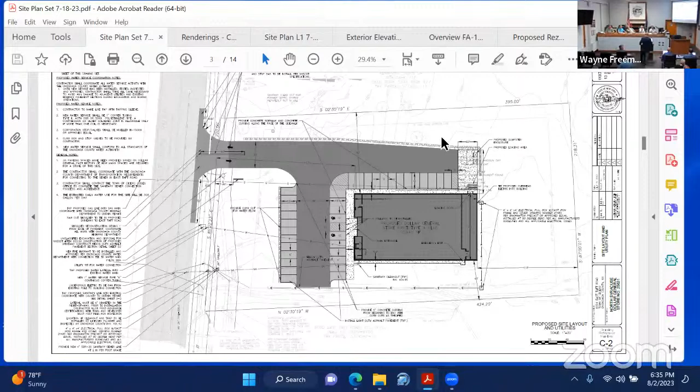Yeah, so this is the simulation I was talking about. Each one of those lines represents a wheel of the vehicle and its turning movement. They use a 53-foot trailer, I think it's a WB-67, which is the largest vehicle you're going to see on site, and typically one of the largest vehicles you see on the highway, unless it's a tandem or something else. But that is their typical Dollar General delivery vehicle.

There'll be other box trucks and smaller vehicles delivering soda, chips, and some of the regular groceries they get in there. So we show all those movements on site, and the county will look at this as well, because they don't want any trucks backing up on our county road.

They've been working with us, and there are different phases of approval for their permits. So we're well on our way, and we've been approved with what we have right now. I think the final approval for the county is when we get a contractor on board, for the contractor's information to be submitted, insurance and all that sort of thing. But that's separate from here, obviously contingent upon your approval and the county being fine with our entrance.

The other items I want to talk about are utilities. All utilities are ready and available. That's why this is a prime site for Dollar General - water, sewer, electricity, all of it coming into the site underground. We're going to bring our electricity underground to the south part of the site along the property line, and then up to a pole that goes into the building, so it's out of public sight.

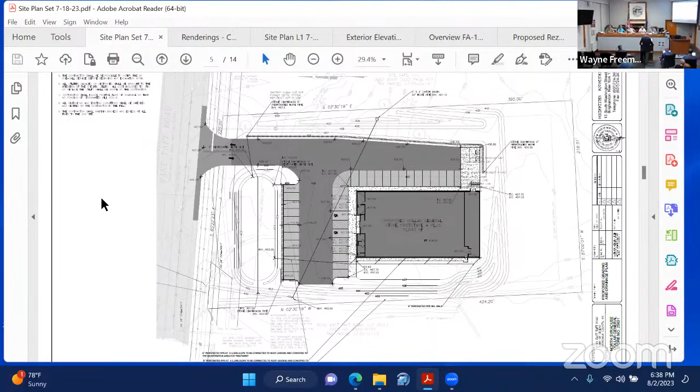And moving ahead, there's a little cleaned up version of our site. This is our soil and erosion controls for the site. You see those large lines up in the swale up top. Those are check dams, basically to slow the stormwater and let some of the sediment fall out before it's collected and

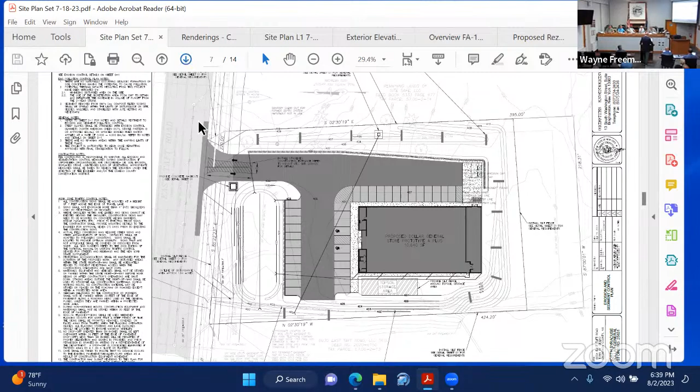introduced back into the existing storm drainage paths. This version here shows the different media that goes into some of the site, stormwater included. That little track we talked about shows the different soils within that treatment chamber. I call it a pond, but it's meant to be dry most of the time. It infiltrates, collects through an under drain, and exits the site.

So this is attempting to show some of the different greenery and landscape that occurs. Since we last met, we had a request to have more regional plantings, not something that thrives in Texas or Florida, something that we're used to seeing here. So the typical plantings you see here, as listed, are native species to the area. If not native, they're ones that actually grow here and are typical.

The sheet you just backed over, the previous sheet, shows a lot of hatching, and that basically shows lawn and rehabilitation. So if you wanted to back up one.

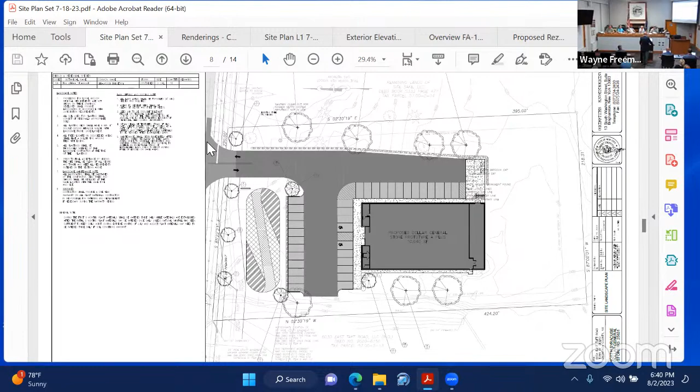Yeah, so this just shows where we're planting lawn, where we have certain soils for stormwater infiltration, and the various surfaces. The darker parking lot surface is heavy duty paving, probably thicker in pavement thickness than any road in the county. It's a pretty beefy section. Where the parking is, it's a little thinner because there's not as much movement as well as large heavy loads. That's the difference in the parking surfaces.

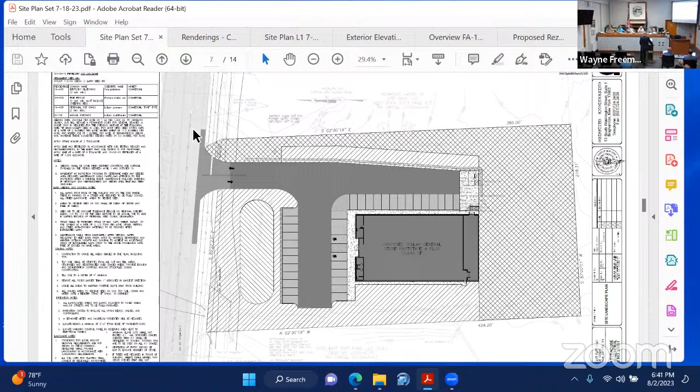And they're all in the back of the plan set where it shows you the details for the various types of pavements and details. If you wouldn't mind jumping ahead.

One more, and these are our stormwater, typical stormwater controls. Those are DEC details that just popped up. Let's see, can you go back one more, back one more. And we're almost there, one more. Yeah, so these are our typical stormwater erosion control details.

They are part of our SWPPP, or stormwater pollution prevention plan. They will be approved by DEC. They're DEC's typical details, as you can see. We're not doing anything out of the ordinary. They're all passive stormwater devices, nothing that's going to have any special equipment needed to maintain or anything like that. So we can advance to the next slide.

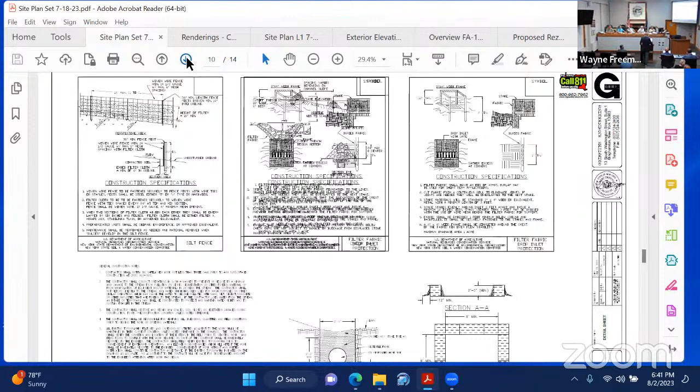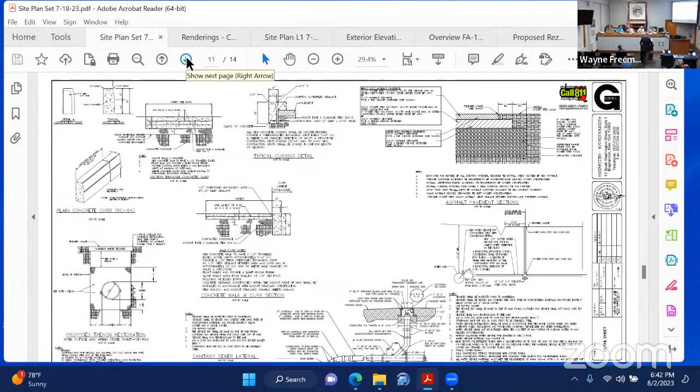Again, they're not really planning items, but they're important that you guys take a peek at them. Of course, our signage, we expect to meet the signage requirements through the Dollar General branding. There's a display of some of our accessible parking signs. And obviously, when you have an access aisle, you have a no parking sign as well, and this just shows the installation of those.

And the signs right in front of the building are installed in concrete bollards with a decorative cover, so no one can breach that flush surface, where we don't have the curb, where we have it flush.

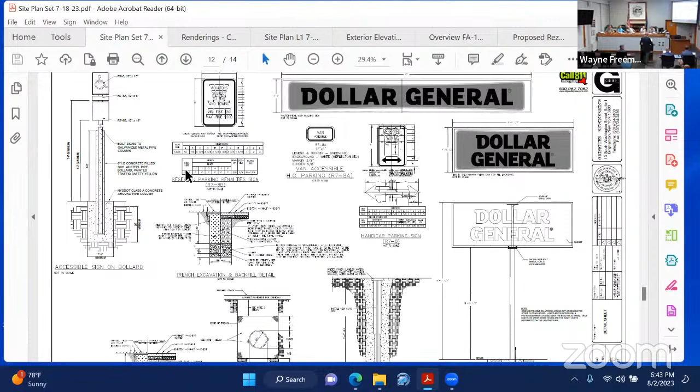And this is some of the elements we use around the site. I show our accessible parking and access aisle that meets all the requirements for ADA. The dumpster enclosure is basically a privacy fence type setup that wraps around 3 sides of the dumpster. I don't think it's in the front, or there's no gate, but it does screen the dumpster itself.

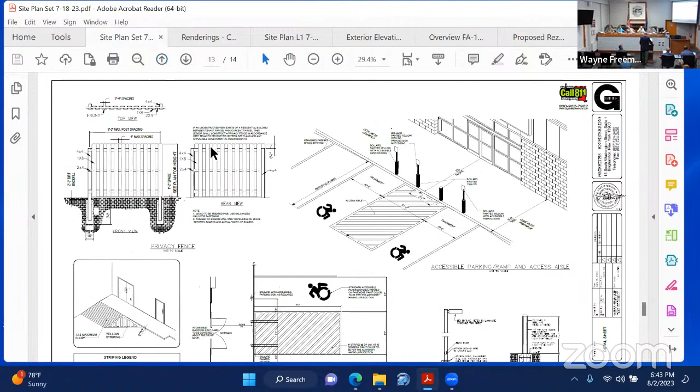And then we have our lighting to our lower right, which shows the poles. I can't read it, but we'll talk about the lighting in a moment, because we did change some pole heights to give you the proper lighting.

But the detail on the left shows the dock doors where the trucks are unloaded. It's not a dock per se, where it's like 4 feet off the ground. It's a flush dock with a ramp. They will dolly the product in and out. And the other door is just an employee entrance.

We're going to take a look at the floor plan in a second. I'll show you the division of the store as far as storage versus retail space, as we walk through these next ones.

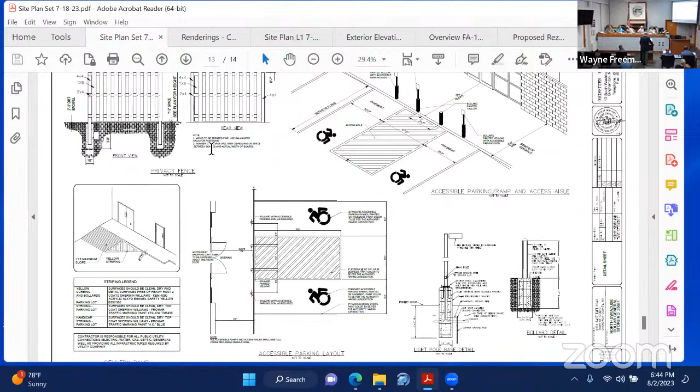Yeah, some of our landscaping. Trying to see what you're looking at. And septic — yeah, I can probably see those as good as everyone else, but typical site details.

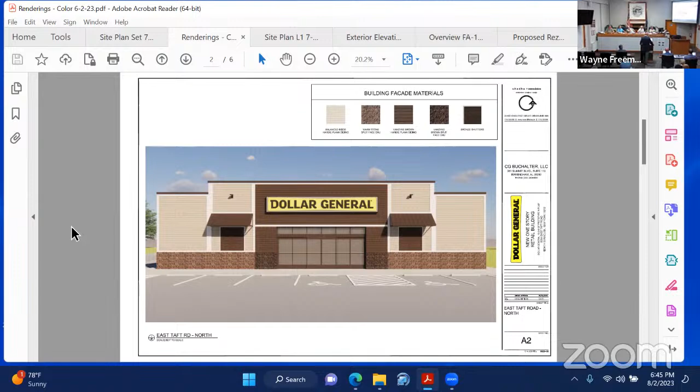So if we look at our rendering, this is the front of the store visible from the roadside. You can see an attempt to render some of the parking spaces, not exactly how it will be, because you'll see a little more reveal on the curb and such. The building will be protected from vehicles, and you'll have an accessible pathway into the store. You'll also see a sample of the lighting on the building-mounted side.

So this side is the east side. This is the delivery side where the truck pulls up along. Not too spectacular, but it's there.

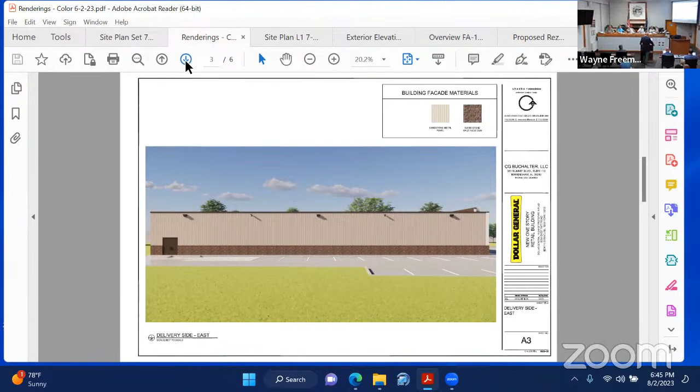You'll see the landscape plan, so you're not just looking at the building. It's broken up with some landscaping and such. And this is the rear, south side. Again, similar—we're going to try to landscape that so you're not looking at just the panels of the building.

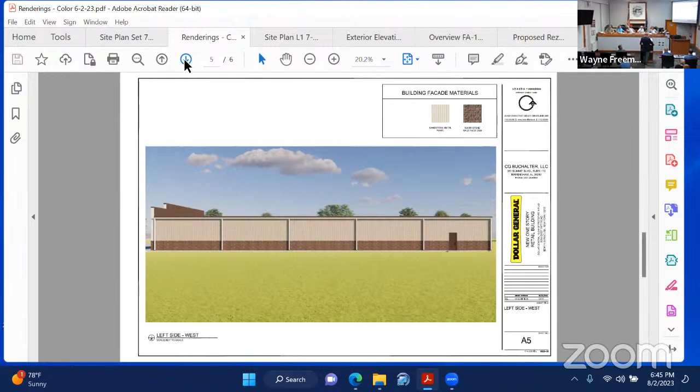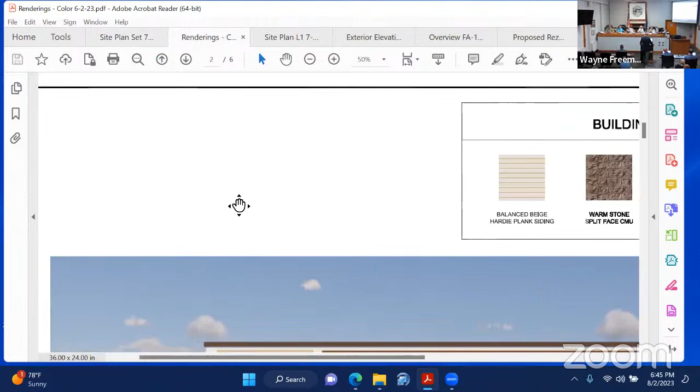And this is the left side, where it's a little more decorative with some brick on the bottom and panels on top. If you were to zoom in on the building facade materials, maybe on the first sheet, it gives you detailed materials that are three-dimensional—they're not just plain flat walls. We do use some materials that give it a little upscale look: the split face brick, the Hardie plank siding, and the warm stone split face, with various textures to break up the elevation of the building.

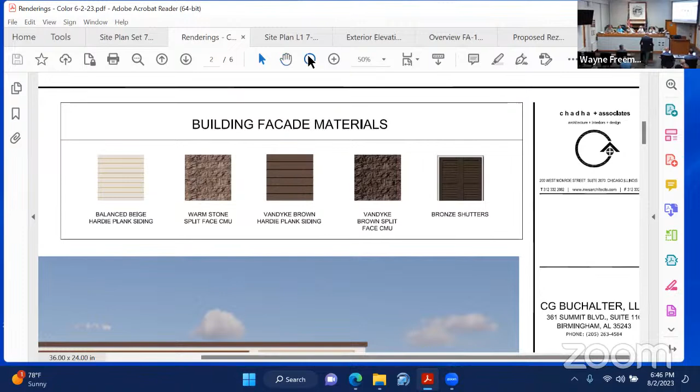Which is pretty typical to Dollar General—it's kind of their brand and their style. I believe if you move ahead in the plan set, you'll get to hopefully a floor plan, and I could show you what's going on there.

It's important when you're in site planning to understand how the interior flows with the exterior. Obviously most of you've been in a Dollar General or similar store. There's a front entry where your registers and checkout areas are, some offices, and a convenience bathroom for customers and employees. They also have end caps and racks of candy and goodies they try to sell you on your way out. Around the perimeter you have shelving on one side, and on the others there's our freezer and refrigerated sections.

And there's seasonal aisles, which will carry holiday stuff at certain times of the year, spring cleanup stuff, planting stuff depending on the time of year—very typical of Dollar General. But the rear of the building is a storage area that leads to the dock, so that's off limits to customers. But obviously, if there was an emergency, every door would be accessible via code to exit the building.

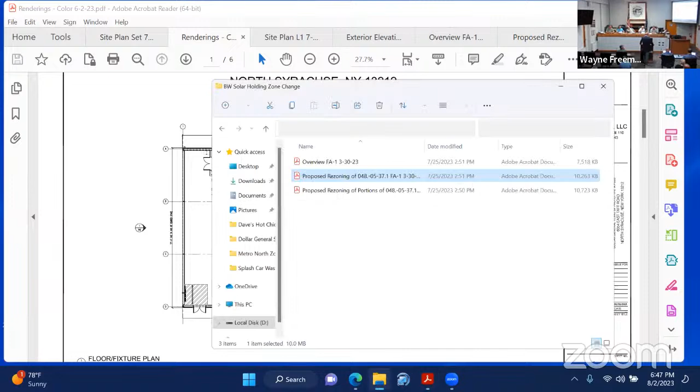I don't know—are you guys in receipt of our lighting plan? Mark, you've reviewed it, right? I have. I think we updated some things to get the foot candles right, especially around the perimeter, so we're not spilling light over. But yeah, I believe you guys have looked at it, and I think it met your expectations.

At this point, if you guys have any particular questions, we can hone in on the exact drawing, or I can explain, or our developer can share operational information with the business. As far as the lighting goes, the lights go off a half hour after the last employee leaves the building—that's a protocol with a timer. The only lights you'll see after that are some low-level security lighting, so that if law enforcement is driving by, they can see there's nobody trying to get into the building. But the main lights will all dim at the close of the store.

We'll open up to questions, Mr. Duval. Just two signs—one on the building and one at the roadside. That is correct, as we have it in the application. Good, Mr. Abbey?

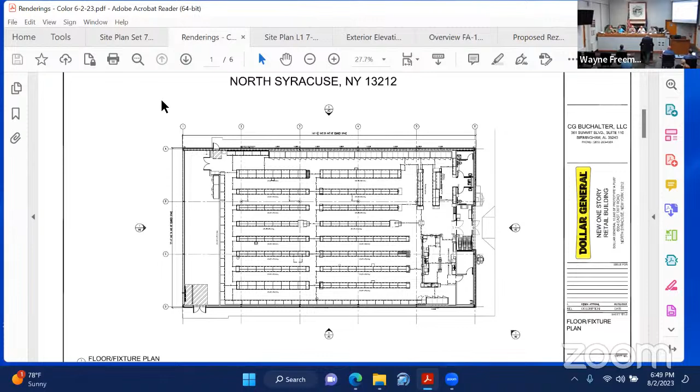Just had a couple of things to refresh my memory. On the signs, are they lit signs or not? Victor, did you want to speak to that? Yeah, the lighting of the signs—when the floor is open, they're lit, and then they turn off with the parking lights when those turn off. Okay, on the building and the freestanding sign? Correct.

Okay, and how many employees are normally on? Two to three at a time. And the hours are typically 7 to 10, but after they open a bit, they could tweak it depending on local need. Most expect it to be 8 rather than 7, but they'll decide that after they open a little bit. How many days a week? Seven days a week.

Oh, all 7? Yes, and I believe that 7 o'clock hour is when they get their deliveries. So someone's going to be there, and I think certain stores will decide to open at that time. Other stores will make their core hours within that time frame, shift it a little bit. Victor stated what works best based on the traffic flows.

It is marked 8 to 10 on the plans. Yeah, so that would be what they have studied for the local area. That would be the average.

And regarding the trash, you say they're boarded on 3 sides. What type of materials do you normally use for that? It's privacy fence material - you guys can pull that up, there's a detail of it. It's a privacy fence, I think it's 6 foot high.

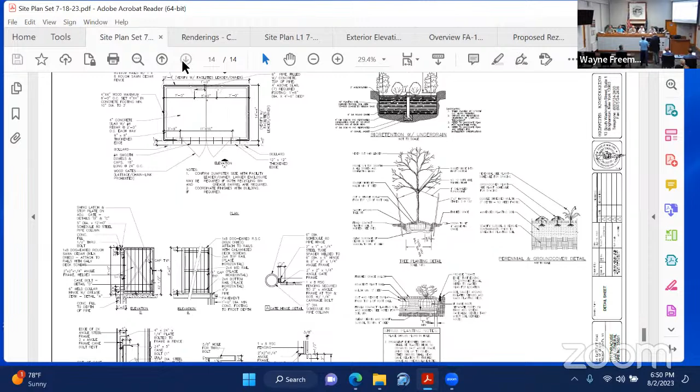Is it vinyl or wood? You can zoom in. It says wood. We normally like to see vinyl if possible, and it stays nice and clean for many, many years. We typically require vinyl.

We love vinyl, yeah, I don't think that's a big deal. So you like a white vinyl, you don't care on the color? No, your choice - something within the color scheme of the brand, the brown or whatever, as long as the vinyl stays nice for many, many years.

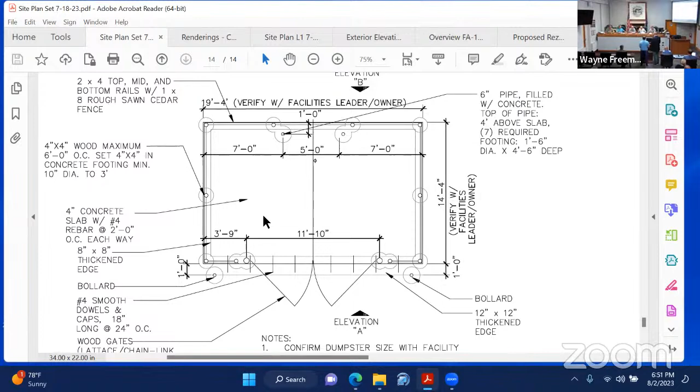I love basically the whole project. You did a pretty good job with layout and landscaping stuff, but it's still a big freaking gray box. And I believe I was quoted many weeks ago - I have little brain problems every once in a while, so maybe I didn't, but I believe I said you ought to go look at the storage building that the fire department built in Brewerton, and you'll see how they took what was a box and made it look like maybe it belongs with the neighborhood. You attempted to do that with your 2 fake windows in the front.

But it's also interesting that when we go in the building, there are no windows. So that's sort of depressing. I mean, a skylight or 2 would probably be nice. But I certainly don't like to see the way it looks from the outside right now.

I think the first attempt for us is to employ landscaping to break up that facade, and I hear you, and I think I'll leave it to Victor. Initially, Dollar General comes down with the plan, and based upon - they don't really have windows or skylighting in any of them - we do add decorative elements to kind of break it up like you mentioned. We could potentially ask if they could add more on the longer side.

Well, we basically don't care much about what the particular company likes to have as their thing. We like our community to look like it's a community, and therefore we don't like gray boxes. Yeah, that's what I'm saying. We can take the front windows and try to duplicate those on the long side facing that parking.

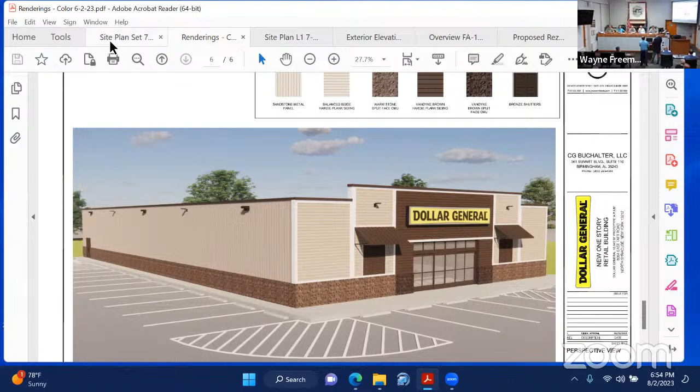I'm all set. Are you specifically talking along the parking side? On the other side, typically, I believe we have some vegetation in place that we're keeping, and we're augmenting that. Yeah, it's tucked in the back. The views that are important to the public, I'd say, is where we would concentrate unless you had other requests.

Well, I think either way you go on Taft Road, you're gonna see a big, long wall. It's a big old gray wall, whether you're going east or west.

The town's currently going through a comprehensive plan review, and one of the things that has come out of that is that we want to work on architectural appearance of structures. We're not looking for this anymore. And so, my suggestion is go back, work with what we're telling you, and come up with some changes. Okay.

So it's just there. You're good. I think we're all set now.

The fire department had some comments relative to the hydrant, and yeah, I think the last time I was here, there was some conversation with the fire - one of the fire representatives - and since then we've installed a hydrant, and I believe all of our building comes within 150 feet of the hydrant.

Through, I think, all of the perimeter, they've addressed all the concerns relative to the fire department. I just wanted to make that part of the record.

That's all I have, Steve. Anything additional? All set, thank you. Yeah, Mark?

Could we ask for an administrative look at the new elevation, or do we need to come back? You're gonna have to come back to the board.

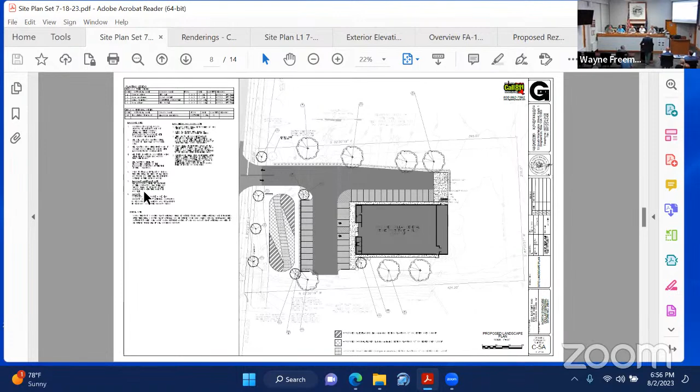Is there anything outstanding besides that, that you guys are looking for? Sounds like no, sounds like we're good. You know, you're gonna want to make the change on the fence around the dumpster. Right, and the architectural look. And you guys serve as lead agency for SEQR, so that'll occur at that time as well. Correct. And did you guys have any question on the EAF at this time, or? You guys were pretty good.

Great, thank you all. Thank you. Appreciate it. Thank you. Good night.

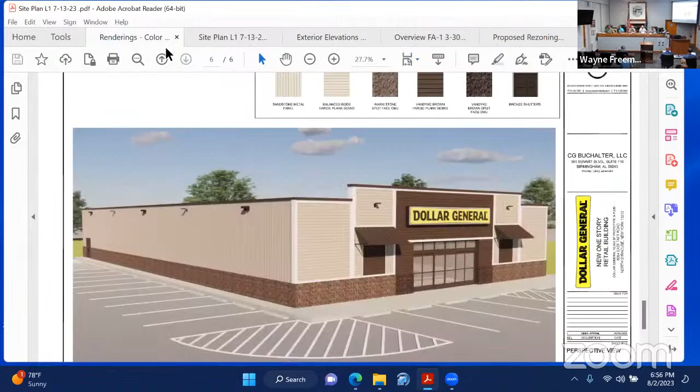The next item on the agenda is for a zone change recommendation from the planning board to the town board. This is for a commercial solar farm, and it's the property at 5728 Crabtree Lane.

Good evening, thank you for having me. My name is Dan Huntington. I am the senior developer for BW Solar. I handle all the projects in New York State, along with my colleague Hamza, who's here as well. I live in Rochester, he lives in Albany. Between the two of us, we split the state with our community solar projects and large scale utility projects.

The project we have before you sits currently on an 88-acre parcel. It has two different zones currently. The front portion, which you see at the northern side, is actually residential, and the remainder of the property is agricultural. We've been working on this project for about 2 years now.

We've incorporated a handful of different changes. Initially, we had tried to situate two different solar projects on this parcel. Through our studies with the utility and also through our wetland delineation with our engineers, Fisher Associates, we came to the realization that that wasn't really feasible. What you'll see on this property, and what we've submitted with our site plan, shows that there's actually a very large DEC wetland on this property. And with that comes a 100-foot buffer as to where we cannot build within that area.

So we originally had a small array to the left on the finger sticking out. We found through our studies with the utility that that was not financially feasible.

It's a great question. There are two jurisdictions when it comes to wetland. One goes to the Army Corps of Engineers, and that allows you to build in certain areas. You could do the pounded post in an Army Corps jurisdiction. Typically, if the wetland is over 12 acres, it goes to DEC jurisdiction. That's actually changing in the coming months to a year, they're going to reduce the size from 12 to 7 acres.

When the DEC has jurisdiction, you can't build in any of it, and there's a 100-foot buffer around it. So this site is large enough that it goes to the DEC, and that applies the 100-foot buffer, and you cannot build in it. There are rare circumstances where you can pay on a per acre basis to mitigate that if you do want to build in a DEC wetland.

It's very difficult and very expensive. Army Corps of Engineer permits are a little bit looser. You can't use fill, so you can't put concrete around your posts. There are very strict guidelines as to what happens if you dig a ditch, how you handle the soil and material, how you keep it on site, and make sure there's no contamination. So there are two different types of wetlands: Army Corps of Engineers with looser regulations, and DEC which is very difficult, so most likely you'd stay away from that.

Thank you, just a curious question. Yeah, we do it all the time.

So real quick, I just wanted to present a few quick slides. Having read through all the meeting minutes over the last two years, knowing that you already have 2 projects approved, and 2 others, another one and ourselves, hoping to come into town and operate here, I wanted to address some of the comments and questions that came up in previous board meetings, and use the old zoning map as a reference guide here to start, knowing you're going through a comprehensive plan.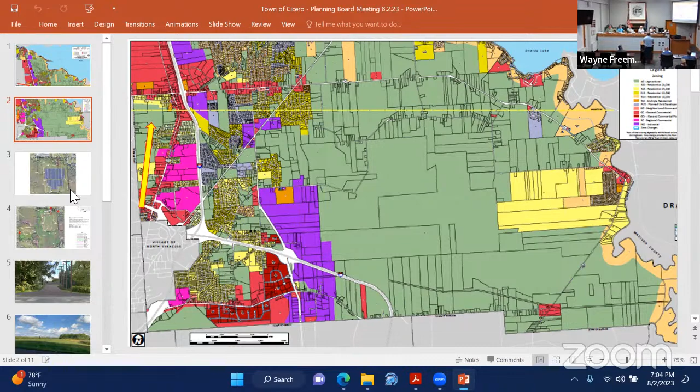This is the array. What you'll see is everything in green with a slight tint around it—that is actually the wetlands.

We had to go a little smaller than we initially planned. We had submitted to the utility a 5 megawatt array. They came back and said that was not feasible on the infrastructure, that we had to reduce it to 3.2 or almost 3.3 due to a flicker issue, because there are other projects on the power lines we're trying to connect to. Those lines are 13.5 or 13.2 lines that can only hold about 75% of capacity. So reasonably you can get 9 to 10 megawatts on one of those lines before you hit a threshold that makes it financially unviable to connect—you start paying for a lot of upgrades to their infrastructure, and that gets very expensive very quickly.

So this is the general footprint we're looking for. Our landowner actually lives right here, and we would be coming in off of this road, connecting to the lines that run along here. We would have a gate up in this area. There will be some poles, which you'll see in a visual simulation later on.

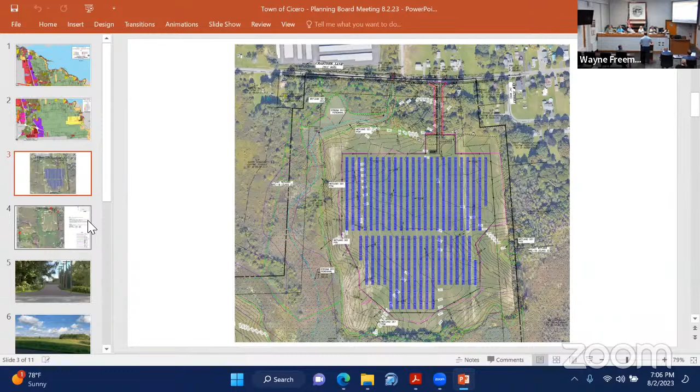All of this will be fenced in this area. We'll be using natural screening buffers. There is a heavy tree area through here, very old growth, heavy trees along here. This side is set back very far from the road, and there are natural screening buffers over here as well that will most likely house crops in the future.

If you can go to our next slide—this is depicting the entire property. As I mentioned earlier, it's very heavily covered in wetlands. Everything with the slight green tint is wetlands, and we have to stay outside of that along with a 100-foot buffer.

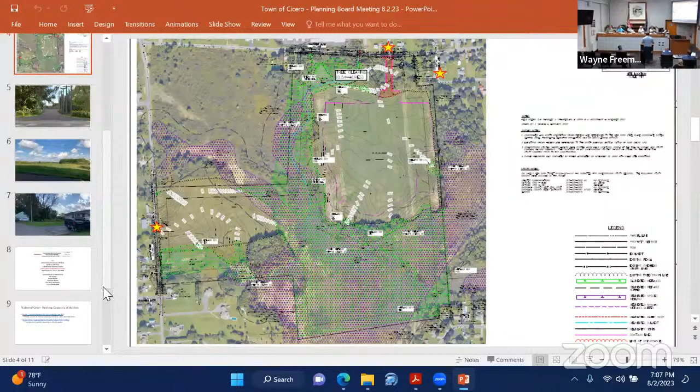So you'll see the purple dotted line here—this was the area we had for operational use. We had to stay within that and design within it. You'll see that there are 3 stars, one at the entrance, one over here to the east, and then one to the west. These represent the visuals we generated for the project.

This road will be a gravel road. Again, our focus is that everything is potentially removable. So the most permanent structures you'll see on this project are the concrete pads for the collection instruments, and then the fencing. That's pretty much the only time you'll see concrete poured—for fence posts and the pad-mounted system. The road, again, is gravel. If for whatever reason we have to bring this site back to its original state, we'll be able to take everything off and return it back to farmland.

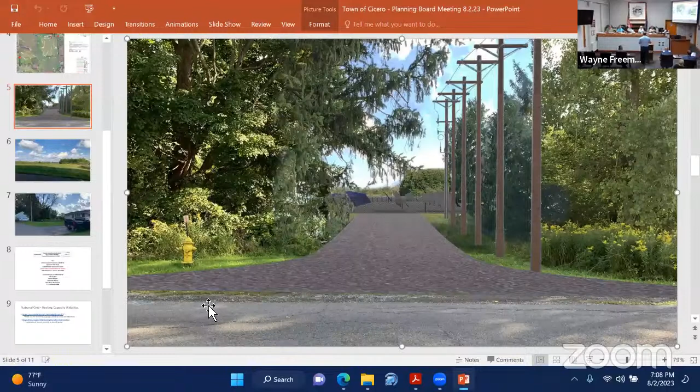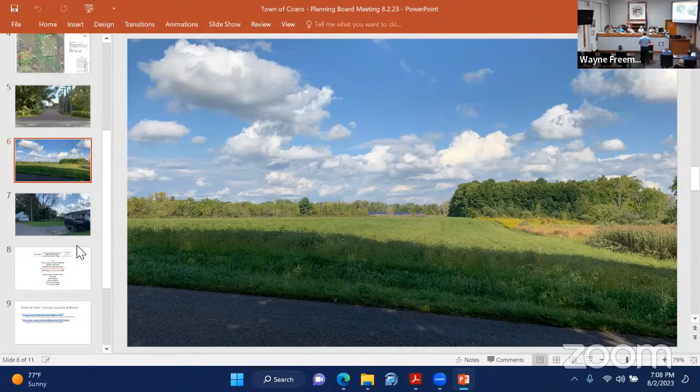That taken from Watt Road? I believe so, yep. And I know it's hard to see, but if you zoom in on the picture, you'll be able to see that there are panels digitally imposed on it.

The benefit of this project that I really like is that any type of visual impact to a neighbor is towards the northern half.

The panels will be facing south. They'll actually be trackers, so they'll be moving with the sun. So we can do a lot of extra things to the north, northeast, northwest as well, because it's not going to impede its ability to generate power.

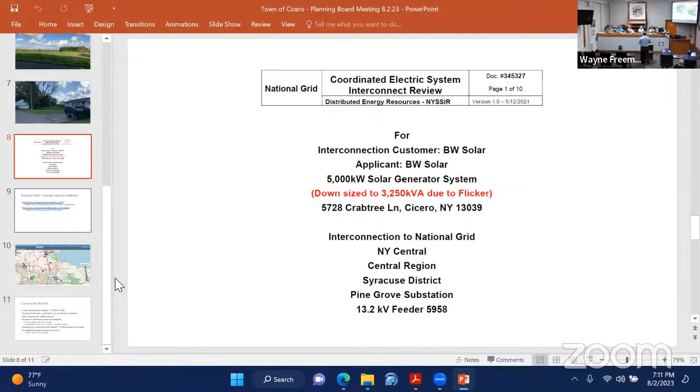I want to touch on this real quick - on this next slide and the next two slides, I included 2 links. These are publicly available resources that the utilities provide. The top link is actually a map, which we're going to show on the next slide, and it shows what the hosting capacity is. That's a tool all solar companies use to figure out where they can operate - we're looking to see what lines have capacity available, and can we submit an application to take up that capacity.

And also, are there any landowners in that vicinity that are willing to partner with us? So we find a line, we go out, and we try to find a landowner who wants to have solar hosted on their land or has enough land for it.

At the time, initially, there was no zoning change requirement. Typically in New York State I stay away from zoning changes, because they are difficult and they're subjective to the town board - there's not a lot of requirements where, if we meet them, you have to grant it. It's based on your desire to have that change. So I typically avoid zoning changes, but obviously this happened halfway through the development, so we're addressing it now.

One thing I will say, looking at your map of the town of Cicero and all the infrastructure you have, is that there are a lot more applications than your board has most likely seen. What that means is companies like myself put in several applications for a specific circuit or substation, and based on the report you get back on its financial feasibility, you determine whether or not to move forward.

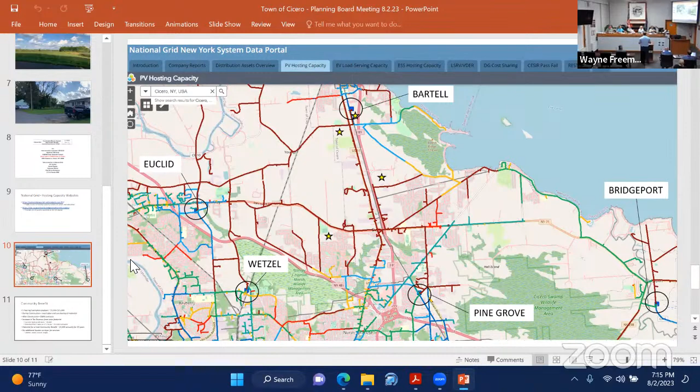This project is not very large, but what we can offer is that by taking some of this land, 17 acres and change, out of ag exemption, we will be required to pay back up to 5 years of that ag exemption to the town. That gets split between the town, county, and school district. During construction, which usually lasts about 1 to 2 years, we try to hire local labor and purchase local materials. After construction, there are O&M contracts for snowplow, fence repair, electrical repair, tree and bush maintenance, lawn mowing, things of that nature.

The potential tax implications: currently the 88 acres out there are roughly paying about $4,000 in taxes. If we are able to get a pilot for this project at 3.2 megawatts, using some round numbers at $5,000 a megawatt, we would in essence be paying roughly $15,000 on just that 17 to 18 acres. That would be for a 20 to 30 year period. That pilot would get split with the county, town, and any jurisdictions involved.

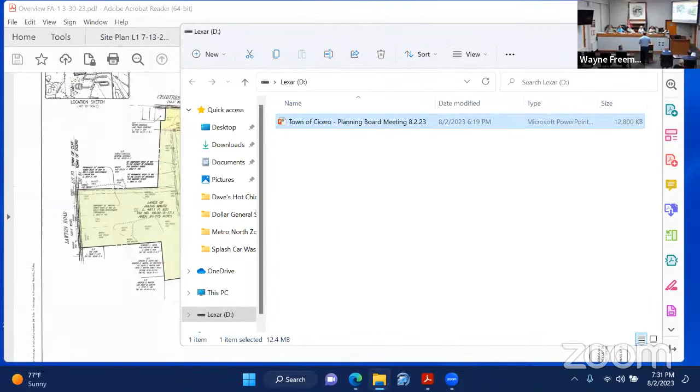We'll move on to the last agenda item. This is for a proposed paint store at 5785 East Circle Drive.

Good evening. Evening, how are you? I'm doing well, thank you. How are you? Good. My name is Paul Ruggieri. I'm representing Endurance Properties and Purcell's Paints. We're seeking to repurpose the former Jimmy John's restaurant eatery located off Circle Drive in the Marketplace Plaza into a Purcell's paint store.

We are requesting a few minor changes to the site and building. One is signage. I've submitted the shop drawings we can go through in a minute. We're requesting some minor changes, one of those being to change the signage from what was Jimmy John's to Purcell's, with Purcell's logos. And also proposing a minor curb cut at the northwest corner of the property.

It's a one-way entrance and exit. You can see the red line where the existing sign is, and the dark line is where we'd like to modify that curb so there's better access into the parking area. Currently, I drive a Chevy 1500 pickup truck every time I go visit the site, and I'm bumping that existing curb. That corner just isn't really negotiable, so we propose putting in a 10-foot radius curb that should allow for better access into that parking area.

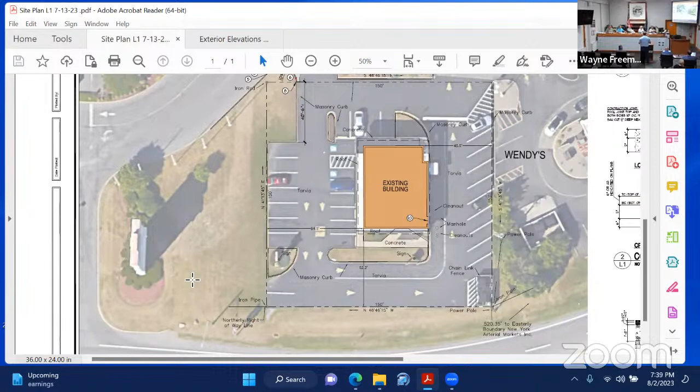Landscape beautification - okay. I mean, if you look at the area along the road where it says iron rod, there could be something in that area, there's obviously room. Well actually, where I want to have you put some trees, it's not your property. That's what I was just gonna say, we don't own that.

Just do it at night. So I guess how do we handle that? Who owns that property?

What's that? Don't worry about the parts you don't own, because everything we own is paved except for that small green parcel. Even that curb cut where we'd like to create it, we don't own, I don't think. Or along here, I'm trying to see where you are. That dotted line, the iron pipe—basically we're paved for the whole property.

If you look at this, you can see there's proposed access to the property on the west side, the way that's flared out and striped. I don't know if that would ever happen. I don't know if you need that wide of an area if you don't have a drive-through operation there—maybe there's an opportunity to remove some pavement along that southern property line and get rid of that.

That adjacent access point—I don't know that there's an easement for it. So there might be an opportunity to remove some of the pavement on the site.

You mentioned a restriping plan. When you say restriping it, are you going to restripe it as it is? Yes, as it is. We intend to restripe it as it is, because our deliveries are going to come into that back door, which is number 10. We'd like to be able to put a truck or panel van there and park it without interfering with customer traffic. But I guess what I'm saying is there might be an opportunity to remove some pavement on the site.